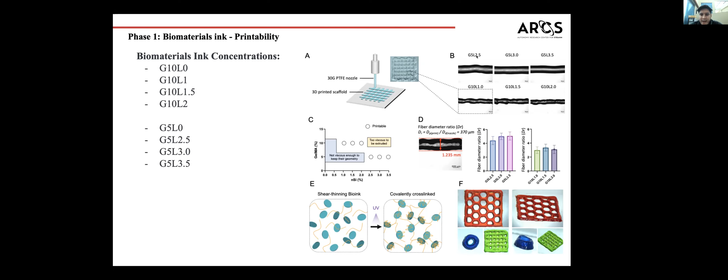Now that we found out which ranges of our bioink were printable, we next wanted to test which ranges were biocompatible.

Similarly, we tested both ranges of our GelMA concentration with the respective laponite concentration, from day 1 to day 10, and found that 10% GelMA

However, when we introduce a higher amount than expected of laponite, we saw a decrease in cell viability. This could be seen more in our 5% concentration, where the ratio of laponite to GelMA is much higher—2.5, 3, and 3.5%—and cell viability decreased drastically.

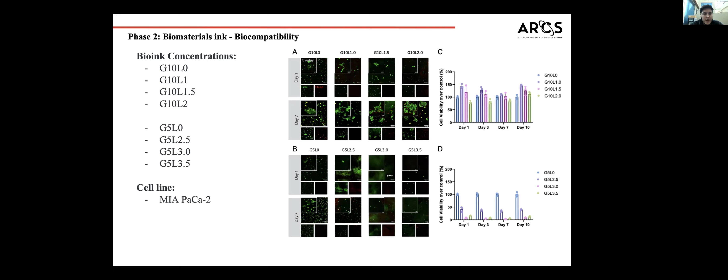Now that we were able to determine the biocompatibility of GelMA and laponite, we were able to rule out 5% GelMA with its respective laponite concentration. So we selected 10% GelMA and its concentration of laponite.

We then went on to test cell-to-cell interaction. We did this with MIA PaCa-2, which are pancreatic cancer cells, and C3H, which are the associated fibroblasts.

We again used our bioink and encapsulated our tumor cells with the associated fibroblasts. We mixed them and were able to print our cancer-stromal assembloids, then imaged on day 3 and day 14. However, when imaging, we had difficulty seeing the cells inside the spheroid and were only able to image the cells on the surface.

So there's not really a quantification of how many cells were present here, just more of a visualization that the cells are there. We aim to see the cells inside our spheroid by doing histology and slicing our samples.

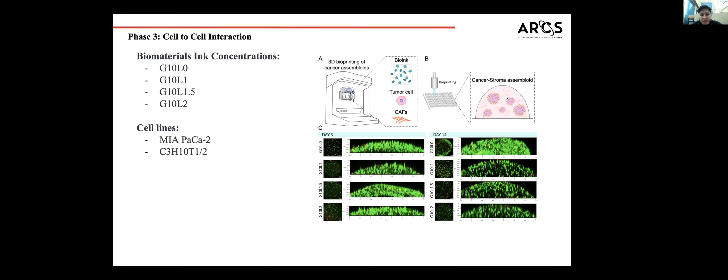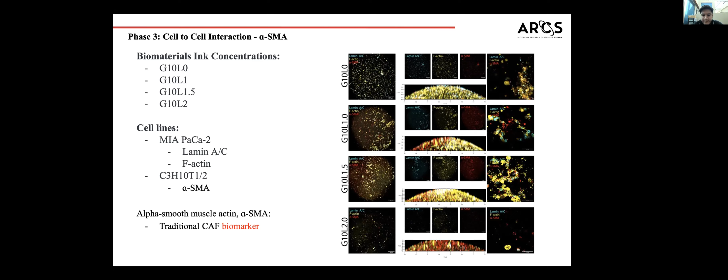That's pretty much it for the time allowed.

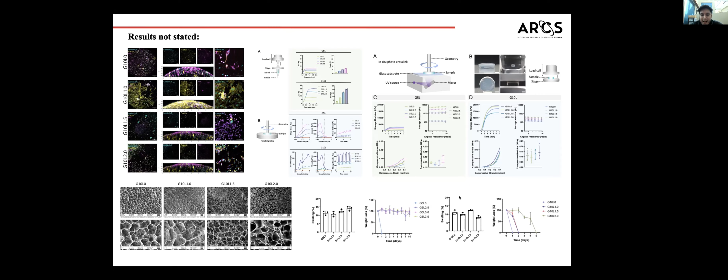We also did some SEM images for our 10% GelMA concentration bioinks, and measured some other rheological analysis for our bioinks. That's pretty much it.

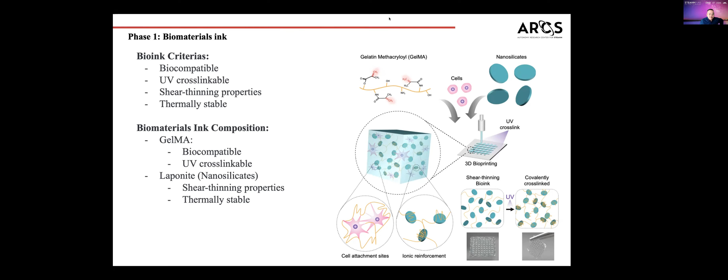Next project we're working on is the partnership with Autodesk and JPL. We have two projects; the first one is the digital twins, utilizing JPL's OpenCAESAR software and Autodesk Inventor. We're trying to design and additively manufacture a multi-physics star tracker for the aerospace application.

Our team members today are Abraham, Rita, and Paula, but we have more students who will be introduced in the slides.

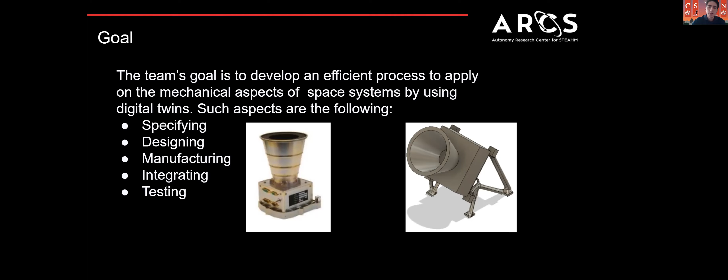So the goal for this project is to use digital twins to develop an efficient process to apply on the mechanical aspects of a space system. Such space systems have mechanical aspects of specifying, designing, manufacturing, integrating, and testing. So we use a case study where the design problem involves a star tracker.

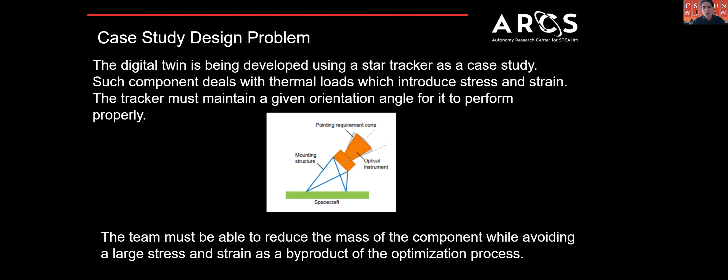This star tracker must maintain an orientation for it to perform properly. It is also subjected to thermal loads, which introduce stress and strain. We want to optimize the bracket, and as we optimize it, we want to ensure that we don't introduce more stress and strain, so we can maintain that angle.

As we work on this optimization, we have some requirements that help us stay within the bounds of what we need to deliver, shown here. So in the first step of the project, we needed to design a computer-aided model, or CAD model.

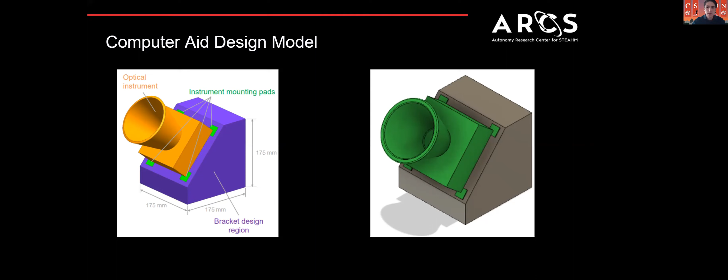As we were developing this model, we had to take into consideration the volumetric constraint shown on the left, where we have 175 millimeters on the three axes. As we were building the part, we had to keep different bodies within the same object. This will be explained right now.

The importance of different bodies comes within the optimization of the part, where we use generative design from Fusion 360 by Autodesk. In the first image, we see the constraints and load application; that's why we had to separate the bodies within the component. The first bodies that can contain either constraints or loads are the green ones.

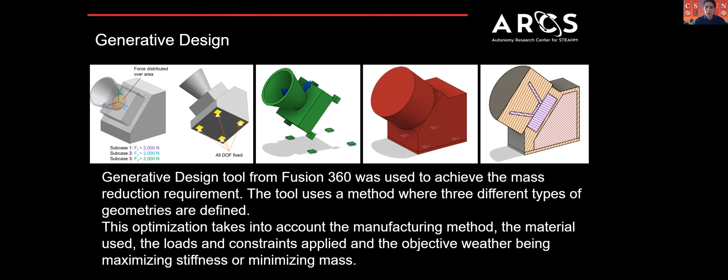Then the third image shows us the boundaries of the optimization, so the optimization will not go into the red zone. The fourth image shows the section analysis of the comprehensive setup for this optimization. Once we minimize the mass, we come up with this type of outcome.

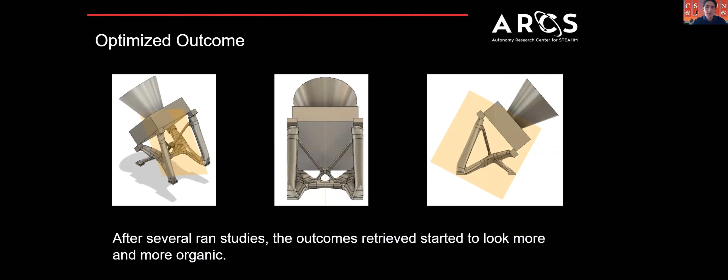This is the best outcome we've had so far, where we have an organic shape with a symmetrical optimization, which will be explained why symmetry is important. Now I will be passing to Paula for her to explain the thermal loads.

Hello again, everyone. My name is Paula, and I'm the thermal analyst for this project. One of the problems we encounter with the object in space is the extreme thermal environment that the vacuum of space poses. This thermal environment involves unfiltered direct sunlight as well as full shade after the object passes into the shadow of the planet it orbits.

So we can observe some extreme temperature differences across a very narrow span of time. These temperature differences can cause the metal to heat and expand as well as cool and shrink, which results in thermoelastic displacement of the bracket material itself.

This thermoelastic displacement is a huge problem since it can affect the direction that the tracker points in. As the metal expands, the structure begins to bend out of shape, meaning the instrument is no longer pointing in the direction it's supposed to, which results in instrumentation inaccuracies.

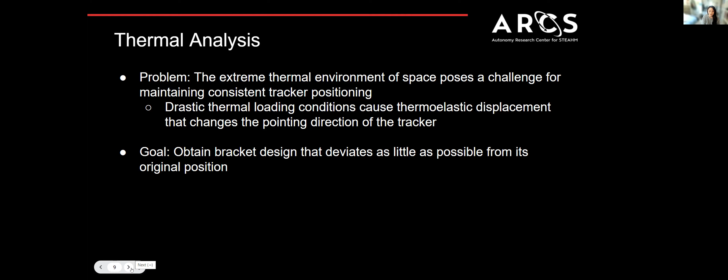So our goal for this project is to obtain a tracker model that displaces as little as possible, or displaces in such a way as to minimize the deviation of the center line of the tracker position, just so we can keep the tracker pointed in the direction it's supposed to be pointing in.

So my analysis portion utilized the thermal FEA package in Fusion 360, and I've got a snapshot of the results from one of my tests right here, just as an example. I tested multiple thermal loading conditions with different thermal loads applied in different regions of the bracket just to see how it behaved under this variety of conditions.

And then I gathered the results for total displacement as well as displacement in the individual XYZ directions. Then I created tables with displacement data and performed some calculus to determine the angular deviation of the tracker's centerline. And this is what I used to determine whether a bracket design was viable or not.

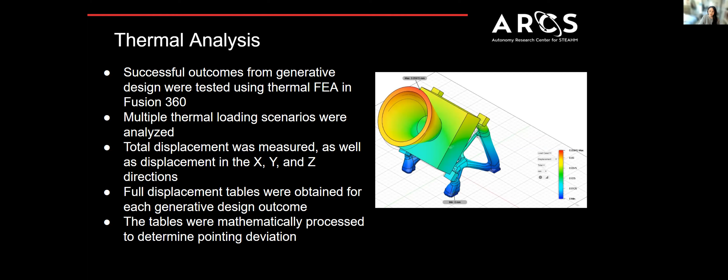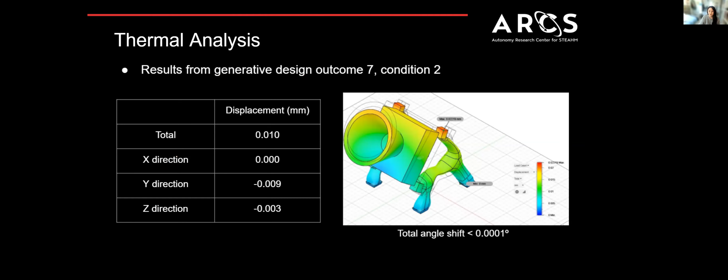And right here, I've just got a quick example of what these displacement tables look like, with a snapshot of the bracket model I was using, as well as the total deviation angle at the very end.

So after running quite a few of these tests on design outcomes that came from generative design, it became apparent to me that we were seeing deviation in all axial directions. And it occurred to me that we might be able to reduce some of that deviation by building design outcomes that are symmetric about the ZY plane.

The reasoning behind this was to create a bracket in which the deviation on each side of the plane would cancel out, which results in a total deviation that only occurred along the ZY plane instead of all 3 axial directions. And this turned out to reduce thermoelastic deviation across the board.

So we decided to continue making models that were symmetric about the ZY plane, just so we could restrict deviation to that plane only. And from these symmetry tests, we actually found one model that satisfied all of our loading conditions so far, which I'll show you on the next slide.

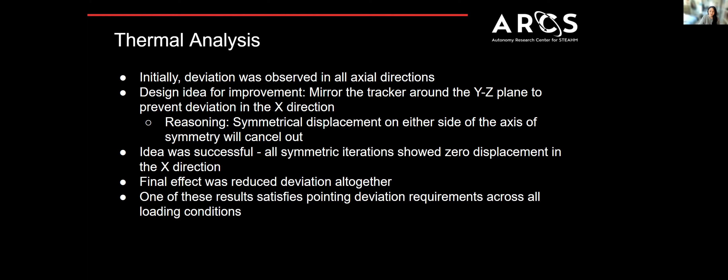And this is the same outcome, but under the second thermal loading condition. And as you can see, the total thermoelastic deviation is still well within design limits, which makes this the first bracket so far to have satisfied both thermal loading conditions.

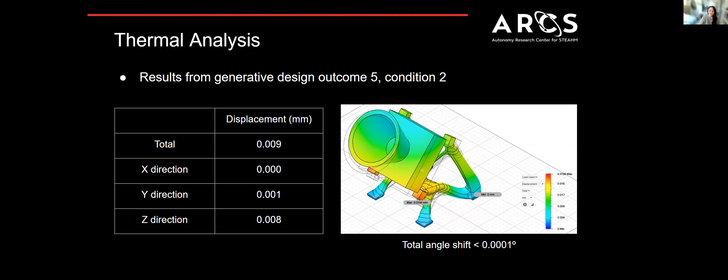So now that we have a promising candidate for the final bracket design, I plan on continuing to test this bracket under more dramatic thermal loads just to find what its functional limit is before it stops performing within design limits. And also I plan on continuing to test any new generative design outcomes to see if any of them fall within design parameters.

And ultimately, we'll choose the model that deviates the least under these thermal loading conditions. And that's all I have for you.

I'm going to pass you on to Rita now, who's going to tell you a little bit more about our code.

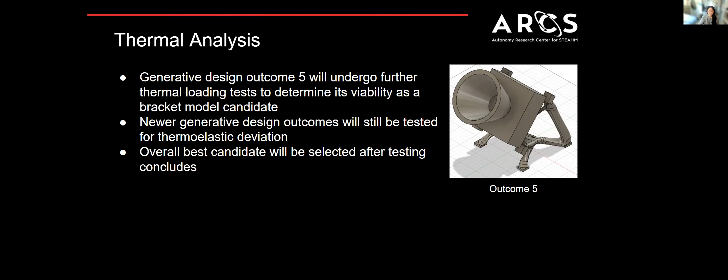Hello, this is Rita Wu, and I am using openCAESAR to create an ontology for this project. openCAESAR includes two parts. One is the vocabulary, and the other one is the description.

This image is just showing the vocabulary design for our project. We are currently using different notations to represent different portions of our vocabulary. We are using a diamond to represent the relations that connect two entities together. We are using a square to represent an entity in this vocabulary. And we are using the yellow circle to represent the property.

This is the result from openCAESAR, and this is also the ontology. This is the thermal analysis part, which includes 6 concepts, and the concept is actually the entity in this openCAESAR structure. For example, the thermal...

This Al6061 is an entity, where inside, the thermal conductivity of 6061 is the property of this concept, also this entity. And this arrow that connects the thermal analysis and Al6061 is called the relation that connects these two together, using this material relation, same as the other parts. Yeah, that's all for the openCAESAR part.

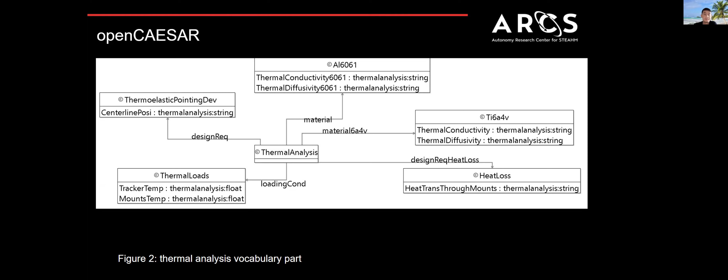Any question? Any questions from the group?

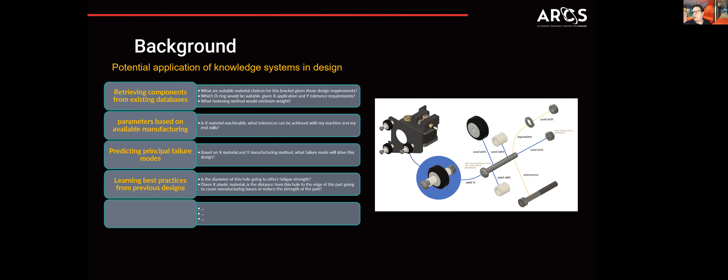So to be clear, we're partnering with Autodesk. All of the stuff we're doing right now is using the Autodesk Fusion 360 design database. Initially we were using the Oregon State Design Repository, but since then we've moved to this because it's a much more robust system. You can see here the kind of assembly data we've been going with.

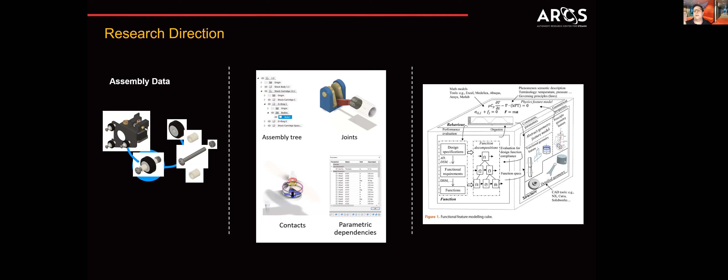We have all of this data, and we're using the joints, the assembly trees, the contacts, parametric dependencies, and running it through a system that's going to take these and turn them into data we can quantify into a graph and then digitize later.

Using this, we're defining stuff as globals, nodes, and edges. The global is the overall value of the graph we'd be using, whereas the nodes would be the actual entities being related. The edges are then the relations between them, and the system-level properties, as I said, would be the globals.

So we could have a knowledge graph that has to do with joints as defined by functions, or we could have a knowledge graph that deals with manufacturing processes by materials. All of these will be nested into themselves, but that's the overall general structure.

In the real world, this relates to how we're going to define this. Initially the OSDR, the Oregon State Design Repository, was what we were basing this on, mostly because it was already geared towards using knowledge graphs. But the way it did it was with child-parent relations and input flows using features, functions, and outputs. This wasn't very useful for what we needed, but the overall structure was good.

So when we switched over to the Fusion database, that allows us to take the links into the connections between the parts, and then we can create joints, contact surfaces, and add different nested graphs on top of different things. Initially when we started, the overall results weren't so great because of particular issues - the body's semantic names weren't really working out, and we found things were a bit too broad, so we decided to introduce some more focused things.

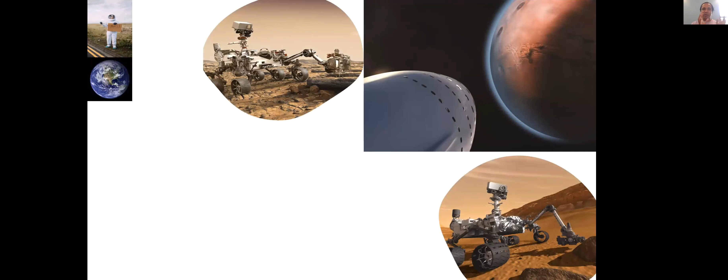So in doing this project, we saw that planning and negotiation played a huge role in how they were able to meet those mission deadlines. So now it was the idea of, okay, we know that planning and negotiation are one of the key things to getting missions done. We want to focus on how we could use autonomy to add into the mix of planning and negotiation. There were two things we really wanted to focus on for future autonomous missions.

One of them was seeing how intent was specified and communicated through the JPL personnel. We saw that there was different ways in how they communicated with each other, and we wanted to see if maybe autonomy could identify the intent and possibly use it in future missions. Another thing we wanted to look at is the roles that each JPL personnel played, and seeing if autonomy could add to those roles, or even use those roles to help with the planning and negotiation process.

Let me go on to the next scene. So we realized that planning and negotiation had a lot of layers to it, and one of the layers we found is that there were two different perspectives within the JPL operations personnel: one was the science perspective, and the other was the engineering perspective. We realized that these are two groups that communicate differently.

So one example of that would be this quote from one of our participants: 'We struggle with the science to engineering communication. On the science side, we're too wishy-washy, or we're not willing to give a firm limit on what we're asking, or we give too much detail, irrelevant detail from an engineering perspective.' So in seeing this, we found that there was this layer, and there were multiple layers.

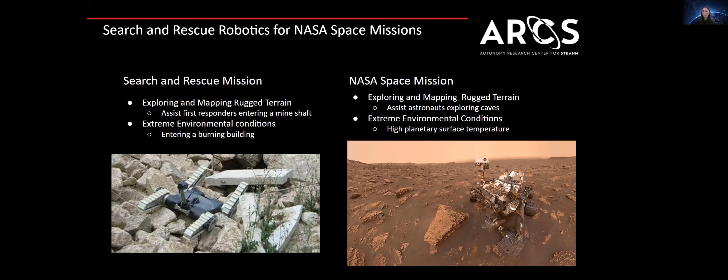or whether the robot is exploring caves for astronauts on another planet for scientific research, both of these are useful tools enabling access to locations that humans cannot normally access.

So our current project is inspired by JPL's Puffer rovers. The version in the first panel is intended to be a foldable pop-up rover with flexible circuit boards to be compact for space travel. The second design incorporates off-the-shelf electronics to be cost-effective, as well as to develop autonomy capabilities. And then here we have the Cadre rover.

It's still in development and is being considered for the Artemis space mission. Exploration of these puffer designs is being used to develop a small, low-cost rover used for exploration in multi-robot teams in high-risk environments.

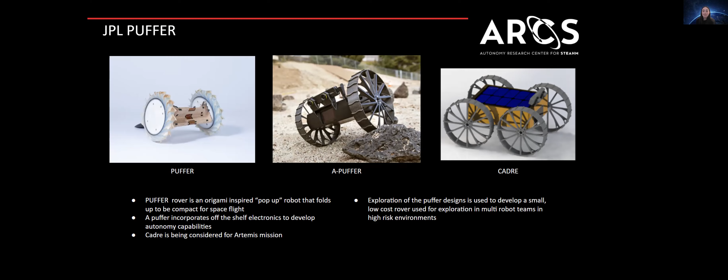So our particular platform, the CSER rover - to help illustrate the practical goal of this project, the current CSER team has developed a storyboard demonstrating an expected use case scenario. An emergency occurs, posing immediate risk in an urban area.

This could be fire, an earthquake, or a flood. There has been severe damage to a structure that is potentially endangering the lives of individuals trapped inside. But here, the CSER rover enters into the building, operated via remote control or with autonomous assistance.

The robot will be able to navigate through sections of the structure that may have collapsed, making them completely inaccessible to human rescuers. The robot is able to transmit live video feed and depth data, providing a 3D map of the interior of the damaged structure.

It also provides data on environmental hazards present, such as gas leaks, all while searching for trapped human victims. This data allows the human team to make well-informed decisions regarding safety points, evacuation routes, prioritizing structure entry, and necessary equipment to perform a well-coordinated rescue operation with the highest probability of success.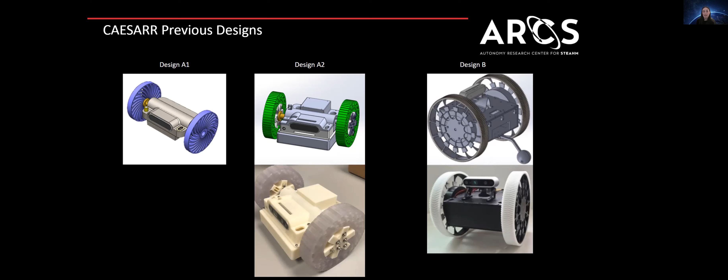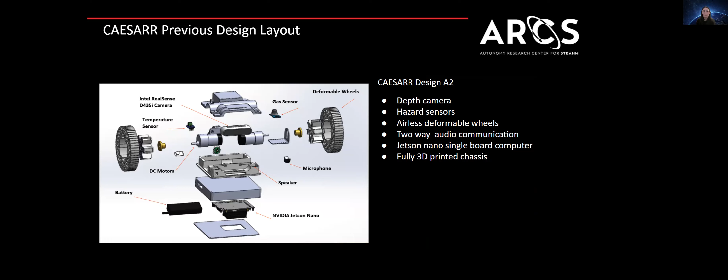And we have design B, which was developed based directly off the A puffer as a mobility platform used in testing software. Here we have an exploded view of the A2 design featuring its internal components and sensors.

Our design process has been guided by the intent on meeting specific requirements for the robot, as well as improving the work already done by previous teams. The first design requirement we want to address is impact resistance, so we want our vehicle to withstand a drop from roughly 10 feet.

Our proposed design utilizes a dual aluminum frame with plates connected by standoffs. This was inspired by drone chassis designs. This metal substructure will provide structural support to the 3D printed chassis, and the intent is to improve upon the previously fully 3D printed design.

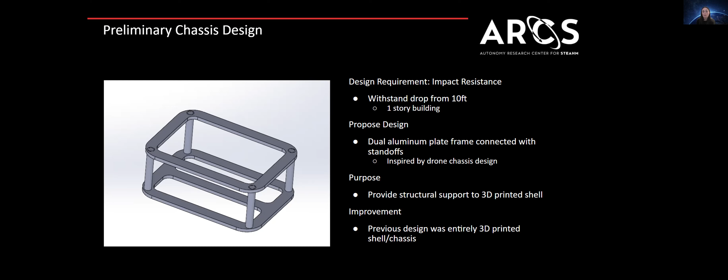Our next design requirement is to address ingress protection. The rover will have resistance to dust, water, and heat. Our design proposal to address this requirement is to manufacture two 3D printed external shell pieces and press fit them together.

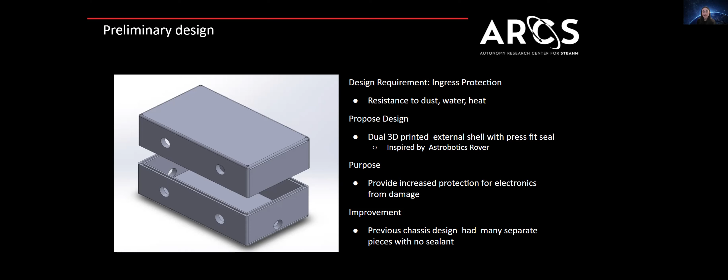The previous design had many separate pieces with no sealant, so the purpose of reducing the number of external pieces and having this press seal fit will be to increase protection for the electronics.

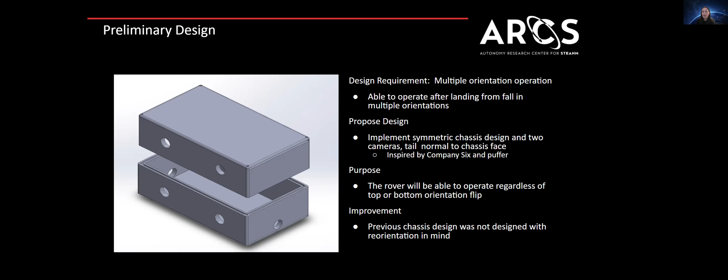As the rover navigates through rugged terrain, it needs the ability to operate after landing from a fall in multiple orientations.

To address this, our design proposal implements a symmetric chassis with a straight back tail. Dual cameras will be used so that it may operate whether it falls facing upwards or downwards, increasing the field of view. The previous chassis designs did not consider reorientation.

The wheel design is another opportunity for exploring the design space and addressing design requirements, to continue to reduce impact forces to the motor and chassis from a fall. The current design proposal is to continue with an airless tire, however incorporating 3D printed spokes in addition to a deformable hub.

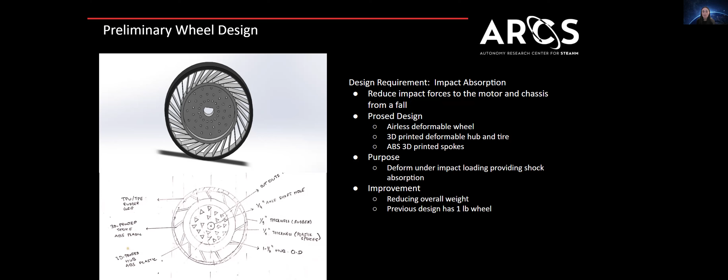In the previous design, airless tires were roughly a pound each, so incorporating 3D printed spokes will ideally reduce the overall weight of the system.

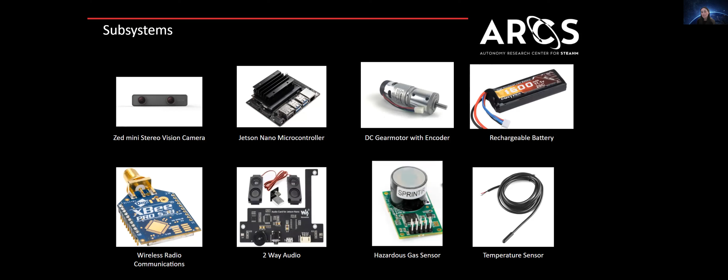These are a few of the sensors and electronics that are being explored through our iterative trade study process, to aid in the continuation of our preliminary design.

Currently, our ongoing work is to complete review and manufacturing of our new design, sensor integration, software integration, testing the mobility platform, and outreach to search and rescue personnel to improve our design requirements. Thank you.

Thank you. Any questions for Jessica?

I have not had an opportunity to set up an interview yet, but the plan is in process. I have been in contact with a person specifically in LAPD, so I just need to conduct that interview, hopefully soon.

Okay, thank you. All right, Dr. Chan, you're back up. Oh, hello again. This has been amazing, you guys are blowing my mind. I love all the stuff that's going on here. So next are my other two ARCS fellows, Maria Pena and Jared Carrillo. They're going to talk about their work with EVAA, an autonomous flight simulator system, and also with NASA Suits, which is developing augmented reality for the next generation of spacesuits. So Maria, Jared.

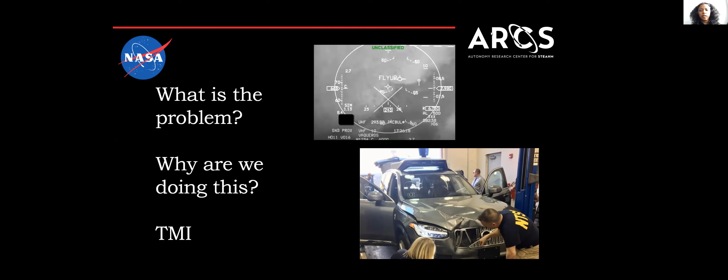That's what we were looking at here, in the project overview. The Resilient Autonomy team tests the maturity of technology and informs airworthiness requirements—finding a path to certification for autonomous aircraft. My role was to observe and provide previously unknown insights that could improve the bidirectional relationship in human-computer interactions with EVAA.

My objective was to obtain a holistic view of work previously done with EVAA and look for recurring themes to generate hypotheses that could then be studied in a controlled environment here in the CSUN EVAA lab. So how did I do this?

I went about this as an ethnographic study. An ethnographic study is the study of the culture and social organization of a particular group or community—both the data gathering and the development of analysis of specific peoples, settings, or ways of life. The way I did this was I analyzed mission reports, reviewed simulation videos, and did interviews to get that holistic view.

The framework by which I looked at everything was through trusting technology—this initial trust formation, which can be compared to how people say, make a good first impression, because that's the one that stays with people. Making that first contact with the technology is crucial because it sets the tone for further interactions with it, helping develop continuous trust in that technology.

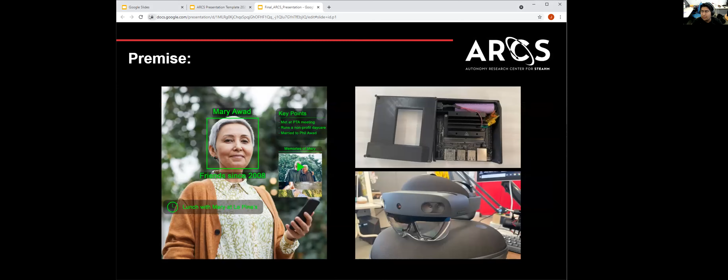Hello, my name is Jared Carrillo, and today I'll be presenting on the work I have done for ARCS this past semester. The title of my work is Assistive Augmented Reality Recognition, Incorporating Machine Learning in Daily Operations.

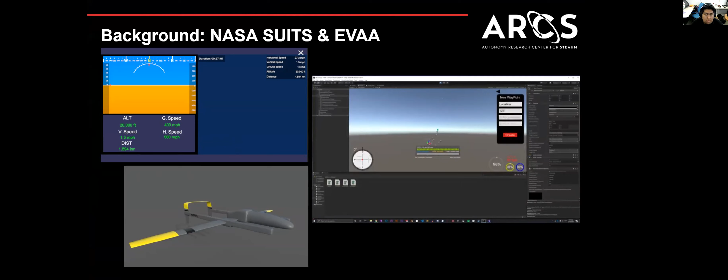Following this train of thought, I began my project with Dr. Chan, and as he is a professor of gerontology, the project I began working on was closely related to his field. The premise of this project was to create an AR application using Microsoft's HoloLens to aid people with memory impairments, specifically in this case, helping people remember their close friends and or family.

The program would use facial recognition to detect an individual and bring up content such as their name, age, plans, or just overall description of them. It would also pull images from one's camera roll of them and reconstruct the photo in a sense. These images were treated as their memories, and if the artificial intelligence detected snow in the photos, then it would generate AR snow at the person's feet in hopes of potentially kickstarting a memory.

The HoloLens is too weak to do this machine learning on its own, so Jetson Nano was used to do the heavy processing. A case was designed and 3D printed, and a battery was added for portability.

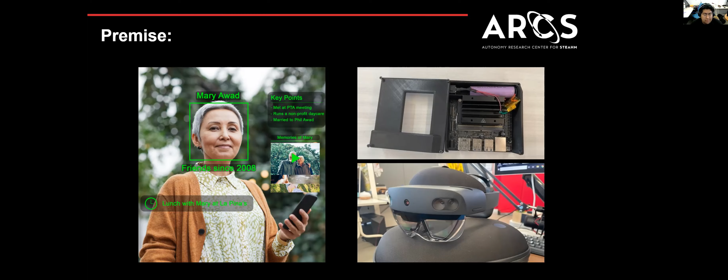In this slide, a basic sample is shown. This is essentially how the program works. It is not fully finished, as currently there is no connection to a phone to pull images automatically from, but the core tech part of it is finished and it's running.

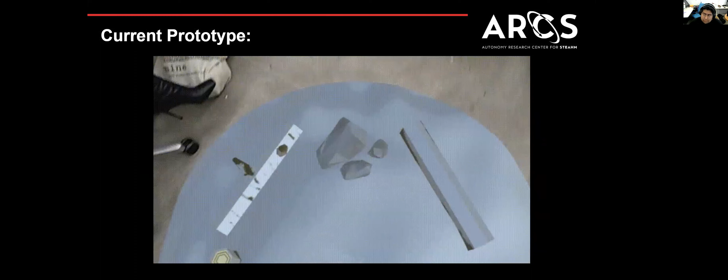The current iteration of this project is tailored heavily to helping those with memory impairments, but it can just as easily be converted for other uses. During the NASA suits competition, it was clear to see that there can be a lot of tools developed to help astronauts up in space.

For example, when it comes to finding items in space, object recognition would speed things up for sure, either to find tools on a ship quicker or find new locations of interest on planetary surfaces. Even without any onboard artificial intelligence, the AR interface itself is a great way for data and information to be presented easily and efficiently to an operator.

Some future directions would be to take what I have done here and incorporate it back into the NASA Suits competition. Another direction would be the 37th annual CSUN Assistive Technology Conference. We submitted a version of this project that has been developed further and can aid people more, such as creating daily tasks for people and generating augmented paths for them to follow for the day. The idea was to create an AI-augmented caretaker assistant. And as this program is focused on NASA, a major future direction would be to incorporate this technology to help astronauts, such as developing object detection software for locating items or new locations of interest.

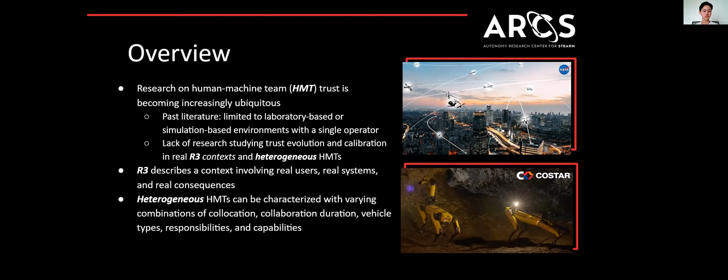Our study seeks to address a gap in current research studying trust evolution and calibration in heterogeneous R3 human-machine teams. This context for heterogeneous R3 defines contexts involving real users, real systems, and real consequences, in which multiple real, highly autonomous machine teammates and real human teammates operate together. Heterogeneity is often characterized with varying degrees of team member collocation, collaboration duration, vehicle types, and capabilities. So in a sense, our project is twofold: in order to study trust in HMT, we must also define the scope of heterogeneity in these contexts.

To address the gap in the literature regarding trust evolution and calibration, we're conducting a 5-year study to obtain foundational lessons and insights on how trust is calibrated and evolves, from the time the heterogeneous R3 HMT is deployed until the level of trust reaches a steady value, if any at all. We also want to identify how technology and non-technology related factors, such as organizational, cultural, and personal factors, can influence trust evolution. We hope to validate extant theoretical trust models using the Lee and See 2004 model as our baseline against trust calibration and evolution of heterogeneous R3 HMTs, adapting and extending it when necessary. We also hope to generate hypotheses for trust evolution and calibration in heterogeneous R3 HMT contexts, formulate research questions, and identify pathways to translate the results of our project to applied research.

This project has direct contributions to NASA by identifying a model for heterogeneous trust in NASA systems. Our study on NASA systems is funded by the AFOSR.

As the context for our field study, we will use three contemporary heterogeneous R3 HMTs of NASA systems to which our research team has access. Our first R3 HMT is the JPL Mars 2020 HMT. The Mars helicopter was mounted on the underside of the Perseverance rover on the journey to Mars in July 2020, and became operational approximately nine months afterward.

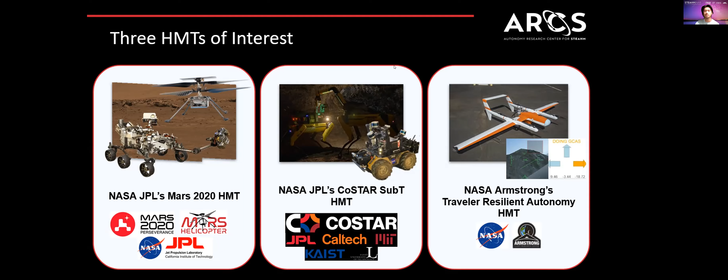Our research on trust and HMTs within the social sciences is often relegated to psychological human factors study, which relies heavily on quantitative methodologies. Based on the strength and success of previous anthropological HMT research on AutoGCAS, we have proposed some unique applications of ethnographic research to the study of R3 HMTs.

Our field study will be designed in the form of three case studies, one for each heterogeneous R3 HMT we have described. Our methodology employs a set of complementary methods, including case study, extended case study, and an approach known as iterative rapid assessment procedures. We will be collecting data over the next four years using surveys, semi-structured interviews, and participant observation. Our data will be interpreted on an interrelated case study design based on job roles.

Anthropological research is about understanding cultural frameworks and context. Since the beginning of this year, we have been conducting what we call non-invasive planning operations. These are informal actions, informal in that they're not considered data collection methods that will show up in our final report writings, but still help us understand the complex sites of interest as they will be situated in our five-year research project. Our sites of interest are complex, fast-paced, and generally inaccessible to the public. Therefore, it is essential to begin building rapport early.